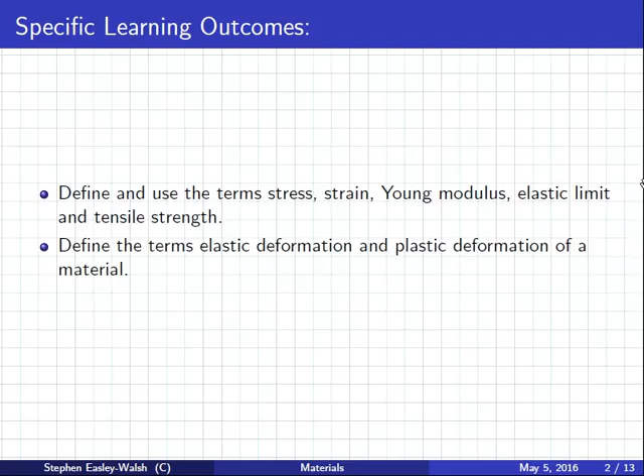Do you know this word, guys? Your English is quite good, so you might know it - deformation of a material. Form it more again, like deform. Yeah, but try to explain deformation without using the word deform. Broken? Not necessarily broken, I know what you mean, but it's not necessarily broken. Like making something from something else, from a particular thing.

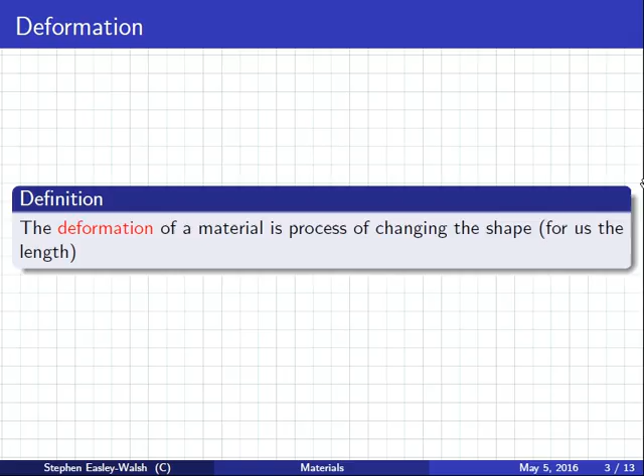For us, usually the length, by applying a force, a stressing force. So for example here, if I apply a force, look, and, well, I bent it without breaking it. If I change the shape of it by using a force, you can say that I'm deforming the material.

So deformation is changing the shape from a force. Got that? Yeah, okay, so that's deformation.

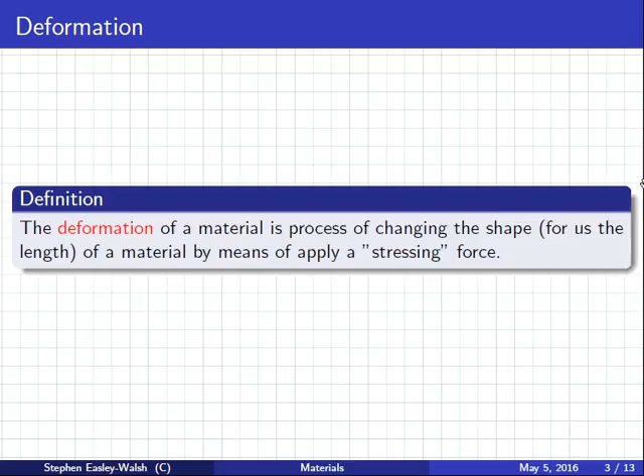Now, stress, I know you understand the word stress. You look at your physics teacher and you think, poor man, so much stress. But there's a physics definition of stress as well. I wonder if any of you know the physics definition of stress. Because, Mir, you said earlier stress over strain. Yeah, so do you remember what stress is?

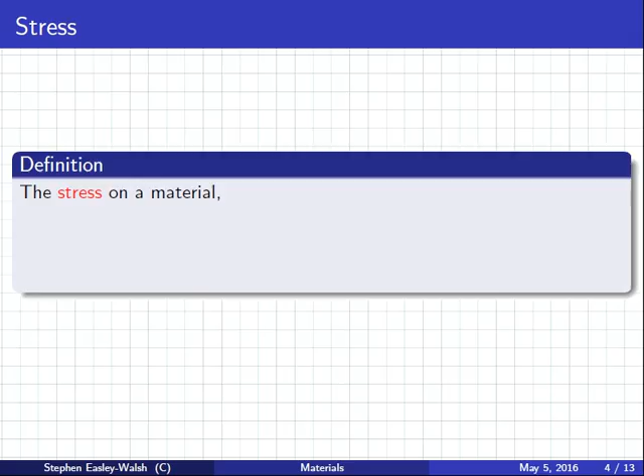I think one of them is like going in, and one of them is like... What's the formula for stress? Length over area - you're half right, one of those terms is wrong. So stress is the force acting on the material per cross-sectional area.

In other words, stress is force over area, which should remind you of something else that you... Pressure, yeah. So what's the unit for stress? Yeah, so clearly the unit is Pascal. So that's the definition of stress.

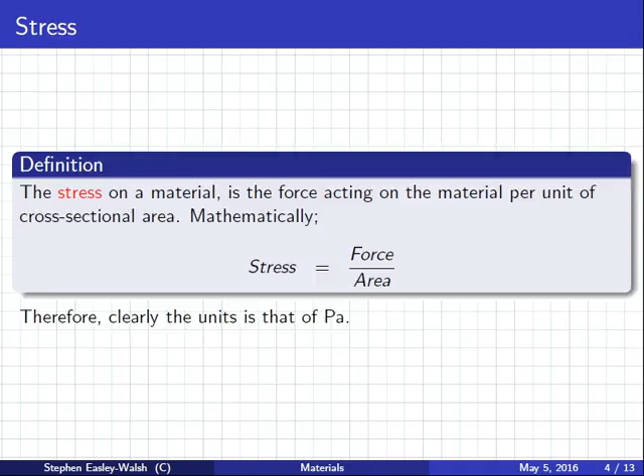Got that? Yeah, okay. Next - strain. Mir or Adnan? No.

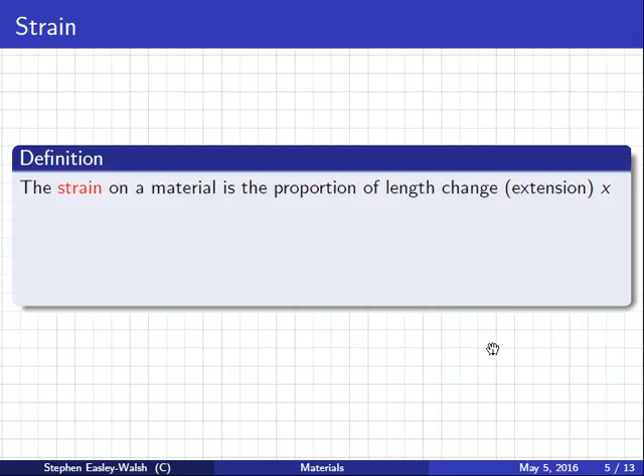Strain is defined as the change in the length, which I'll call x, that has taken place during a deformation. So basically, it's how much the length has changed compared to the original. So as a formula, strain is just the extension divided by the natural length.

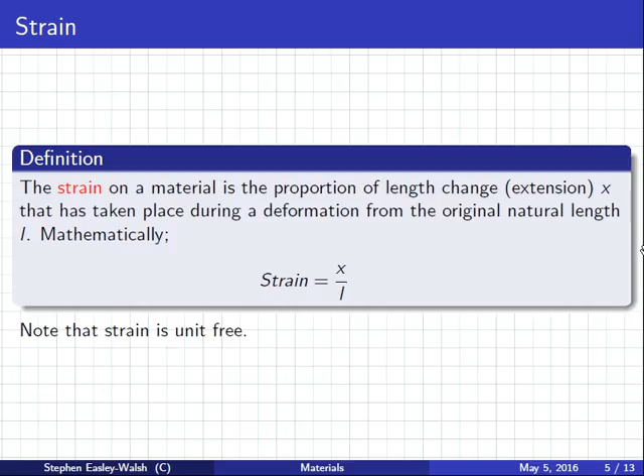And you know this one, Mir, Young's modulus. Now, just so you know, I use the letter Y, but I think a lot of books use the letter E - but I don't like that because that looks like energy, so I use the letter Y. Although in the exam they don't use any letter, they just write down Young's modulus, so it doesn't really matter too much. So Young's modulus is defined as the ratio stress to strain, that is, stress over strain.

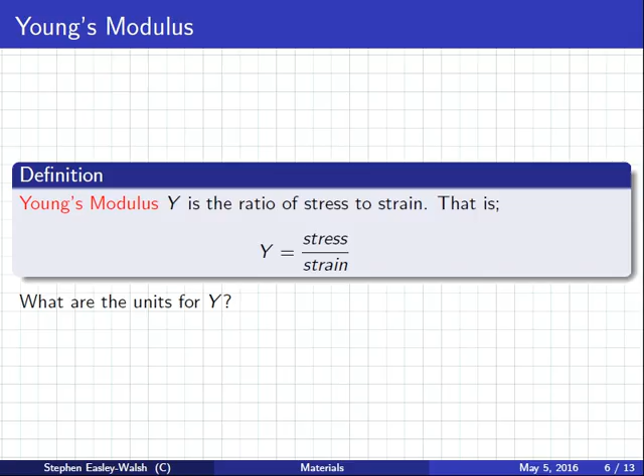What's the units for Young's modulus? Pascals. Okay.

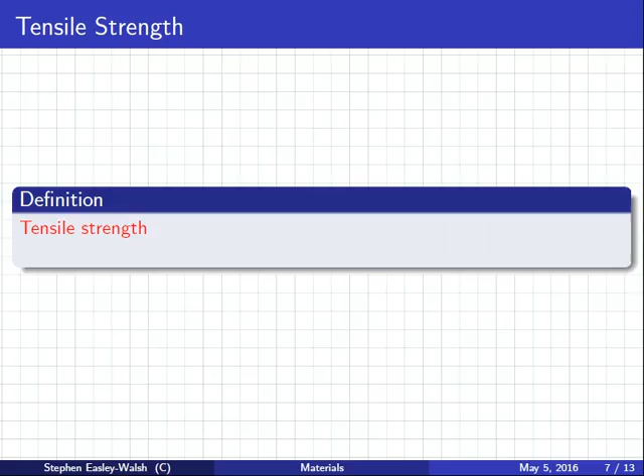Tensile strength, is this a word someone might know? No. Tensile strength is the force you need to basically break something - like a rope or a wire, it's the amount of force you would need to snap it. It's like the limit.

Tensile strength, of course, is measured in newtons - or is it actually newtons per square meter? I'm not sure actually, newtons I think. But all you need to know is the word, you don't actually need any formulas for it.

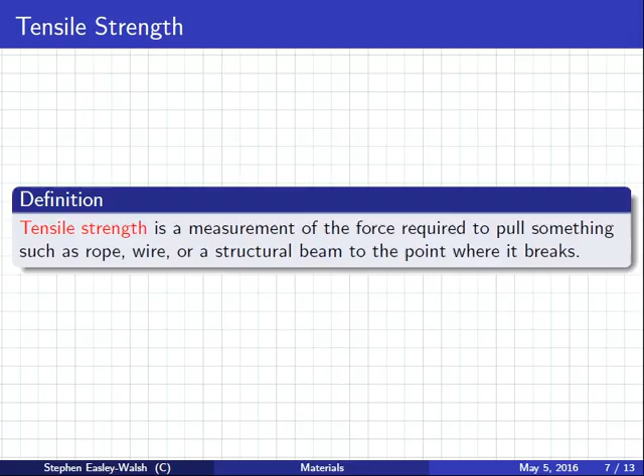Okay, let's look at a stress strain graph and compare it to an extension force graph. So... come on, it's frozen.

Stress strain, okay, so let's just look here. This one here is stress, and this one here is strain.

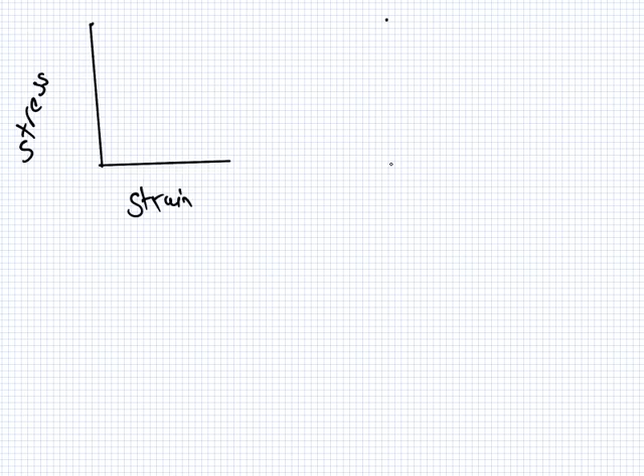How can we know that? Like, do we have to write something on the y-axis or the x-axis? Yeah, I wasn't clear with the way I wrote it. I should have written it like this: stress against strain, which is y against x always. It usually goes y-x.

So the next one then is extension force, for example here. Or did I put the graph the other way around last time? Did we do this graph last time, or am I thinking about the January students?

We did one graph, we said that it's important. What graph did I do last time? I don't remember.

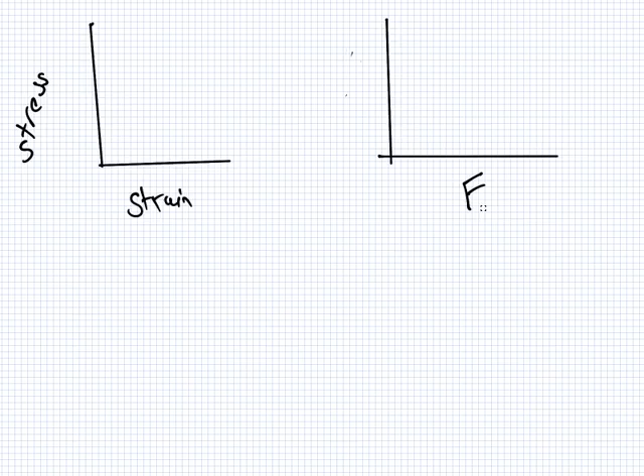Yeah, it was on the what? It was the other way around? Yeah, okay, and then I'll need to change that. It was like this, is it? Yeah, okay.

Do you remember what the slope of this graph was? K, it was K, wasn't it? Yeah. Now let's have a look at what we have here.

So the slope would equal - remember, it's stress over strain here. The formula for stress is F over A, and strain is extension over natural length.

Now you can change this into F. Let me think... A, 1 over A over 1 over L, times F over extension, like that. This can be cleaned up as L over A times F over extension.

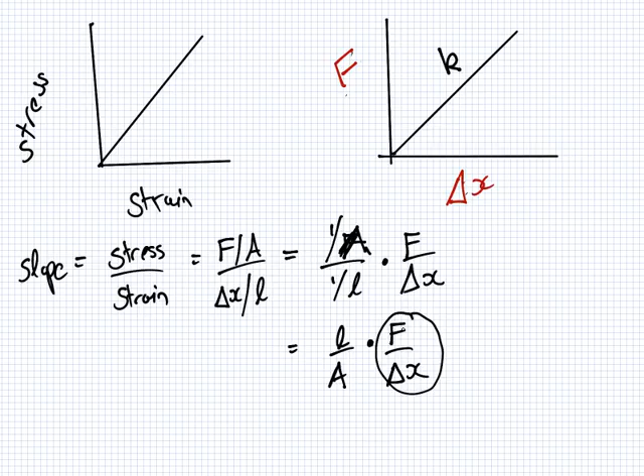Now, what is this though? If you look at this graph, what is this? Well, this is the K, isn't it? And what did we say the slope of this graph represents? What is stress over strain? Young's modulus.

So what I'm trying to get you to see here is that there is a strong similarity between Young's modulus and the spring constant, the stiffness constant. So if a material has a high value for K, then it also has a high value of Young's modulus, and vice versa. Remember we said if K is big, then it's not stretchy, it's kind of stiff. Likewise for Young's modulus - if it's big, we have the same feeling that it's a stiff material, not a very stretchy material.

So I suppose all I'm trying to get you to see here, if you want to write it down, is that Young's modulus has a similar interpretation to the stiffness constant. No, you don't have to write all this down, I'm just trying to get you to see the link. This isn't even a formula in the course - I just want you to see that Young's modulus is proportional to the stiffness constant.

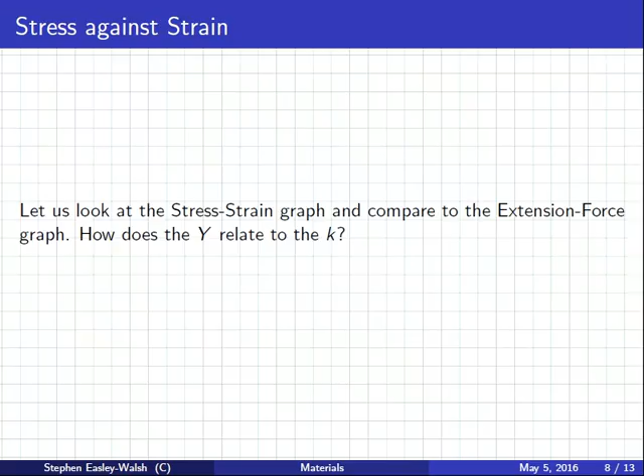Okay, so what we're going to do now is give you some values of Y for different materials. Come on, wakey.

I had extension on the x-axis, so we usually write the y first. So I just need to swap them.

Okay, let's have a look at some values here. Something that's really, really stretchy, like rubber, the Young's modulus is 0.10 times 10 to the 9. Nylon is also... they all look kind of big. I guess what I'm trying to say is usually the numbers for Young's modulus are quite big, because remember we said if it's very stretchy it should be small, and if it's very stiff it should be big.

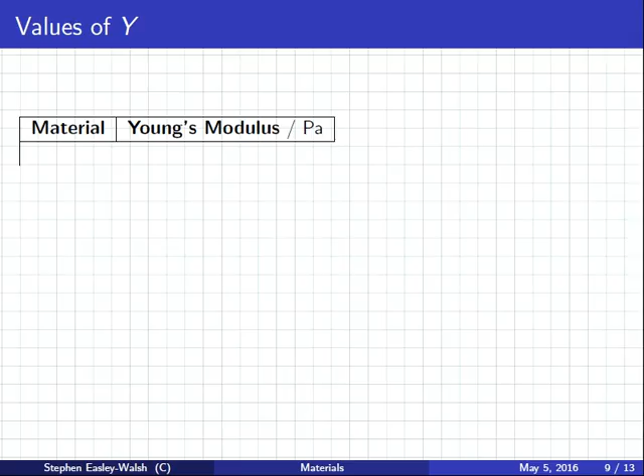So this is rubber. Is rubber stretchy or stiff? Stretchy. So this is small, although you can see how big it is, this is actually a small value for Young's modulus. So first one, rubber, 0.1 times 10 to the 9 pascals.

Okay, so let's move up. Do you know nylon? Yes. So that's also stretchy, 2 times 10 to the 9.

Now we're starting to get to material which is less stretchy. Wood is a little stretchy because you can kind of bend it, so that's 10 times 10 to the 9.

Glass, now we're getting into materials which are not stretchy, although glass is a little stretchy because you can kind of squish it a little bit. It's 70 times 10 to the 9.

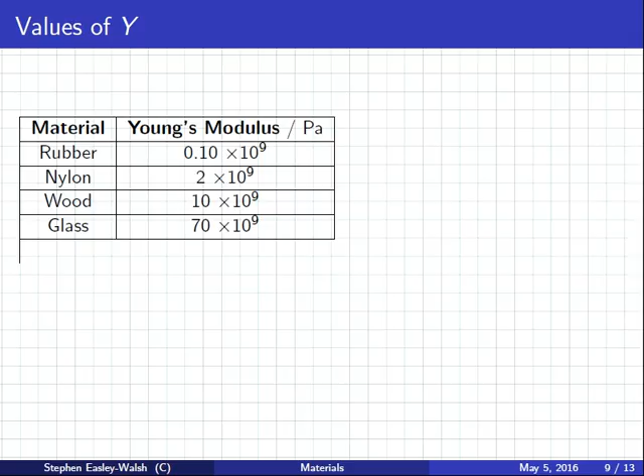Next, brass. What is it? It's bronze. No, what's brass? I can't remember what's next up. It's an alloy, copper and... aluminium? I don't think so. Iron? No. Do you do alloys in chemistry? Metal alloys? I think we did metals. Yeah, did you do brass? Yeah, it's copper and zinc.

Copper and zinc, okay, 100 times 10 to the 9. Copper, 117 times 10 to the 9. Steel, 200 times 10 to the 9.

Graphene, 1050 times 10 to the 9. And graphene is the material in your pencil. And that's it.

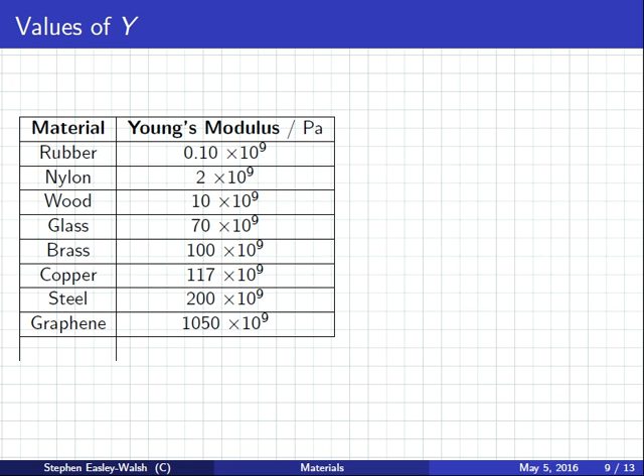Okay, you got those? I have too much. There, okay.

Right, so here's our first example here. You don't have to write it down, you can just draw it. A boy hangs a 100-gram mass at the end of a 1.5 meter copper wire, which is attached to the ceiling. The wire is 2 millimeters thick. So you can write or draw it, but we'll do the question together.

I might have one you can borrow.

Okay, did you write this down, Mir? Adnan? Yes. Continue? Yeah, okay, so let's have a look at it now.

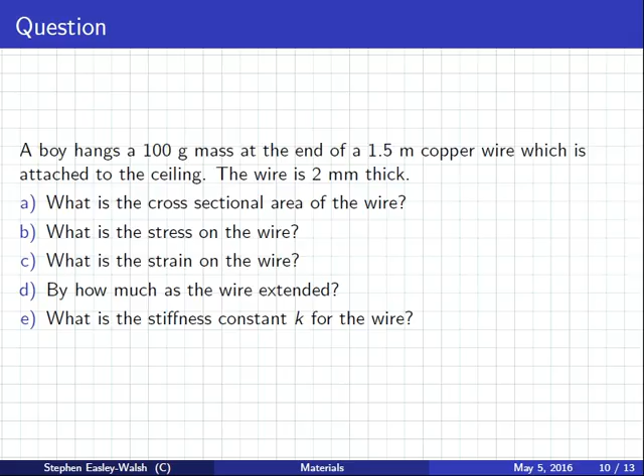Let's see, it's 100 grams, it's copper, it's 1.5 meters long. So, sorry, what did I say? 100 grams, so 0.1 kilograms, and the length from here to here is 1.5 meters, and the thickness 2 millimeters.

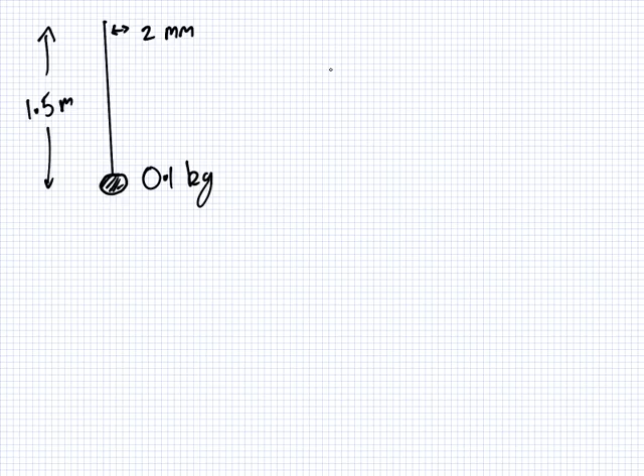And what was my first question? It was cross-sectional area. Okay, so you said the formula earlier, Adnan. What is it for the area of it? Yeah, the area is pi r squared. And what's the r here?

0.002. Gotcha, it's half of this, because that's the thickness. The radius is half of this number. So it's 1 millimeter is the radius, which is 1 times 10 to the minus 3 squared, which is pi times 10 to the minus 6, which is 3.1415 times 10 to the minus 6 meters squared. So that's part A.

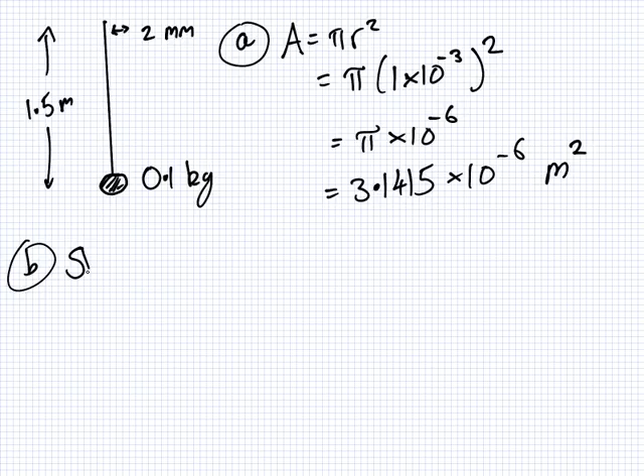Part B is stress, is it? Yes, stress is F over A. Now, what is the F here? What's causing the stress on the wire? Yeah, it's the weight. So that's mg over A.

Well, we were getting worried, we thought we'd have to send people to search for you. We were thinking maybe you fell down a hole. No, what happened to you? I missed the bus. Really? That's so unlike you. Why'd you miss the bus? Actually, I didn't miss the bus, I think the bus didn't come. Oh, you're changing your story. No, you should always stick to one story with your teacher. The bus didn't come? Yes, I went to the bus station and he didn't come, and then I went to another. That's okay.

We are doing physics, as you can see, because I was going to do maths, but these two people weren't in the last class, but they were in the last class for physics, so that's why I did physics instead. Wow, well not wow, do you have your physics stuff with you? Do we have physics today? No. I don't know, you'll have to write in your maths book and copy it later then.

Okay, what were you saying the force was, Adnan? The mg. So that's 0.1 times 9.81 over 3.1415 times 10 to the minus 6.

Okay, got that? Part C, strain. Now we have this formula for strain: extension over natural length. The problem is we only know one thing in this formula - the natural length. Do we know the extension?

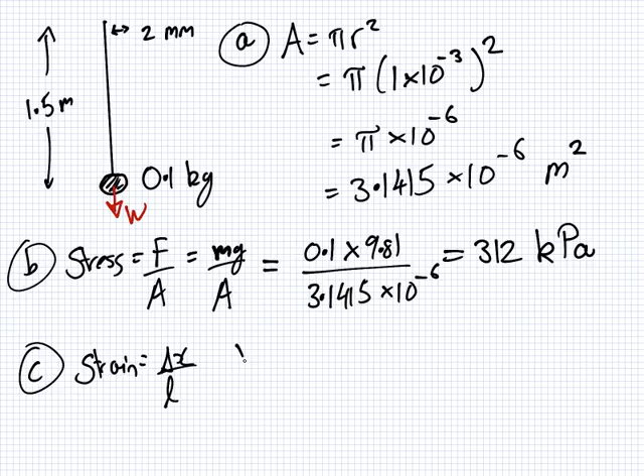We don't have to, we can use a different law. We can use the formula that Young's modulus is stress over strain, because we know Young's modulus for copper - I gave it to you. We've just worked out the stress, so the strain is the stress over Young's modulus. What is it for copper? 117 times 10 to the power 9.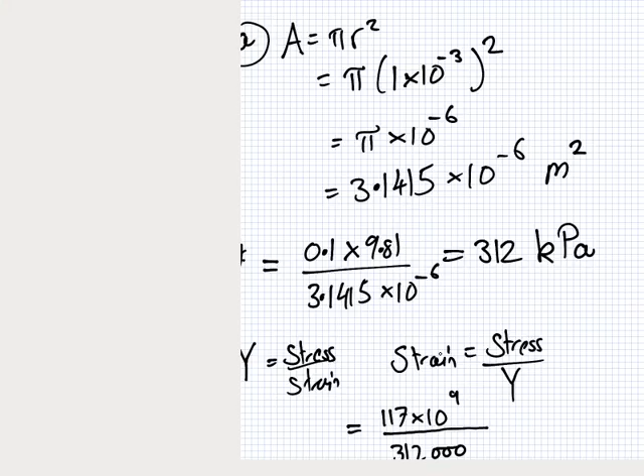.375 times 10 to the 3. That's the strain here. Have you studied this before?

So this is all confusing. Great. Okay, well, you're writing everything down? Okay, continue.

Now what is the extension? So I can use this formula now because I know the strain is 375 times 10 to the 3. The extension is what we want, and the natural length is 1.5. Wait a second, something went wrong here - my strain is too big.

Oh, it's over - I have this upside down. 312,000 over, what was the 117 times 10 to the 9? No, I'll just flip it around here. 2.67 times 10 to the minus 6.

Okay, strain equals extension over length, so that means extension is strain multiplied by length, which would be 2.67 times 10 to the minus 6 multiplied by 1.5, which is 4 times 10 to the minus 6 meters.

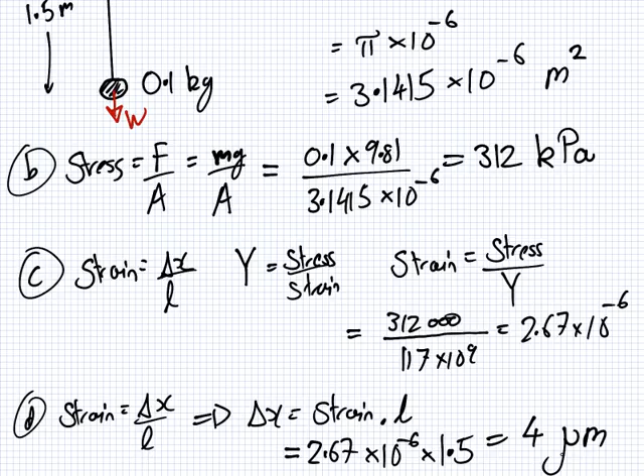And lastly, the K. So you have F equals K delta X, or Kx, whatever letter you want to use. So K is F over delta X, which is mg over delta X, which is 0.1 times 9.81 over 4 times 10 to the minus 6, which equals...

245 kilonewtons per meter.

This is a typical exam question, which I actually think is quite good in the exam. It's not that bad - you're just really using a couple of formulas, which are quite simple really, because they're all just fractions.

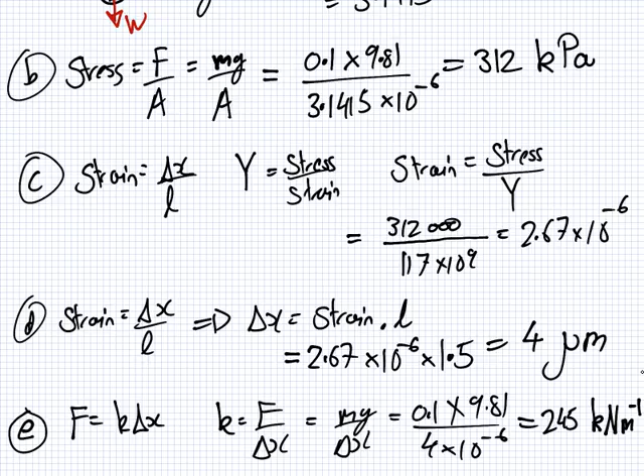Continue. Are you doing the tutorial now? I think we'll do the tutorial today as well. I think so, because yeah, we will. Okay.

Next question. Just one more: 4 metal beams, 2 centimeters by 2 centimeters by 2 meters, are used to support a platform. The platform of mass 3000 is suspended from the beams. 1000 kilograms is placed on the platform. The beams extend a total of 2 millimeters.

So let's do this one together. I'll try and draw it. You have 4 beams - yeah, you know what I'm drawing - and they're all attached to a platform, and this hangs from the ceiling.

And this platform, I said, is 3000 kilograms, and then somebody puts a mass on it of 1000 kilograms. When you place the 1000 on it, it extends, it gets basically 2 millimeters longer when you put the 1000 on it. What's the strain? What's the stress? What's the Young's modulus?

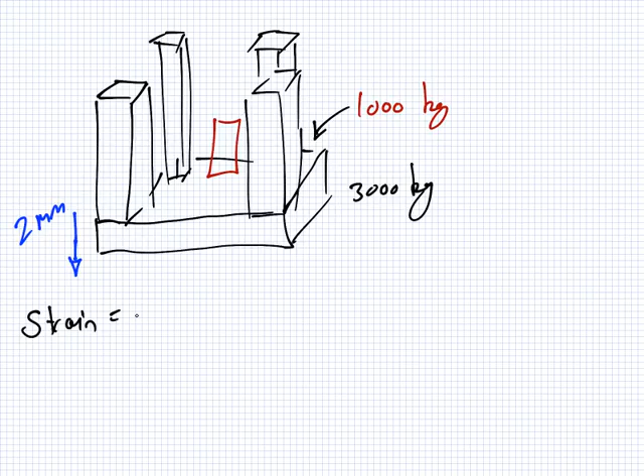So we'll start off with the strain. What's the formula for strain? Yeah, delta X over L. So that's 2 times 10 to the minus 3, and what did I say the original length was? I think it was 2 meters - originally it's 2 meters long. So that's over 2, which is just 10 to the minus 3.

So that's okay, yeah? Right, what do I want next? The stress. What's the stress here? Yeah, force over area. Now the force is what? The weight, 1000 G. Yeah, why not 3000 though?

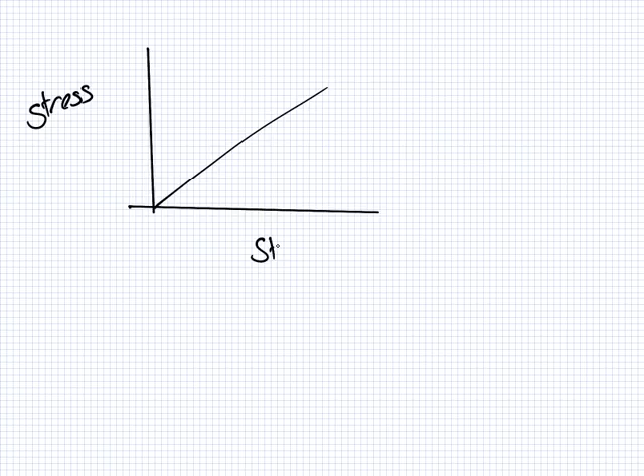Red herring, yeah. It's a bit like - if you were to look, I can't remember if we talked about this - but anyway, if I go back to the graph here, this is stress, this is strain. Isn't this what we drew earlier? Yeah. So Young's modulus is stress over strain.

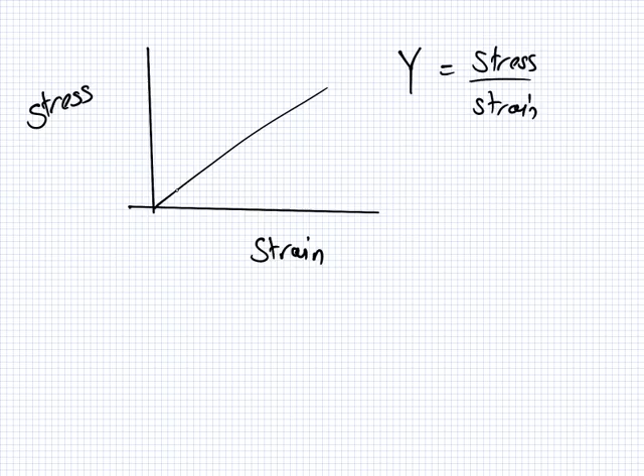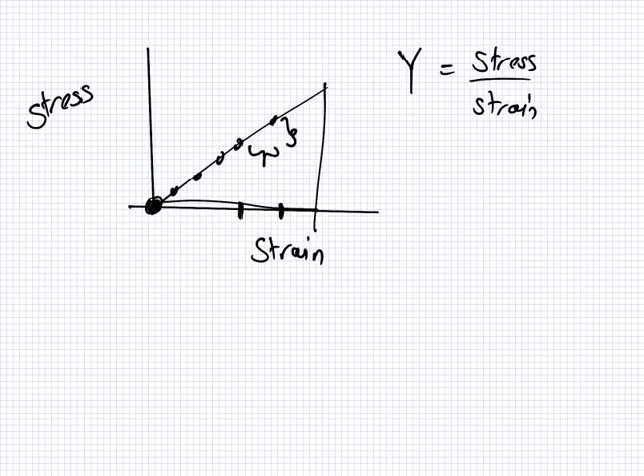So if there's already 3000 on it, or 2000 or whatever, and then you add more force, like 1000, the Young's modulus is just the difference in the stress divided by the difference in the strain. It's like the extra stress divided by the extra strain. Usually we start at 0, so it's the total stress divided by the total strain. But in this case we're not starting at 0, that's okay. We only care about the difference, so this 3000 is a red herring.

So if I go back here, it's 1000 G over, and what's the area? 0.02 times 0.02 times 4... or sorry, it's the other way, not 4 there. 1000 G divided by 4. Why do you think I'm doing that? There's 4 beams, so this is the force on each one individually. So what we're doing is we're just looking at one of them, so I'll divide this by 4.

And it's 2 centimeters. So why did you ignore that 2 by 2 meters? It's 2 centimeters by 2 centimeters by 2 meters. Yeah, this is just the area though. No, you don't care about the length, it's the area.

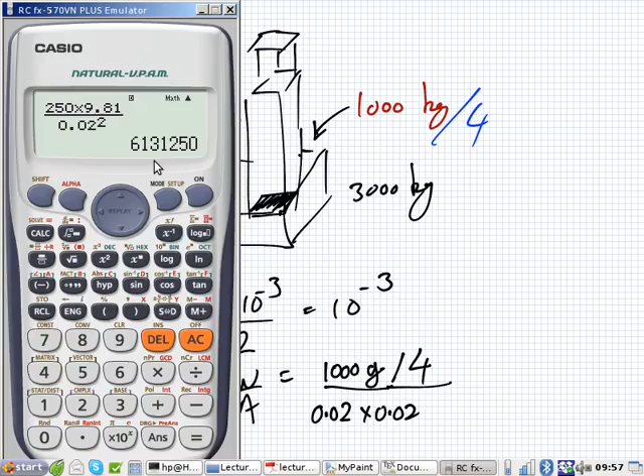So that would be 250 times... one, two, three... 6.13 mega. What is the stress on each beam? Each beam has this much stress.

What is Young's modulus? Yep. What's 10 to the 9? Giga. 6.13 gigapascals.

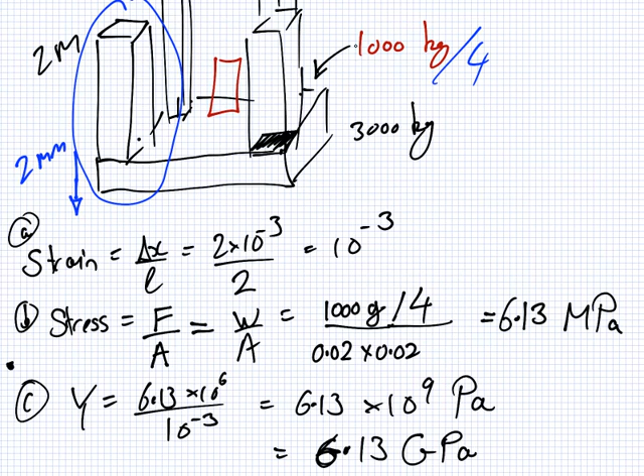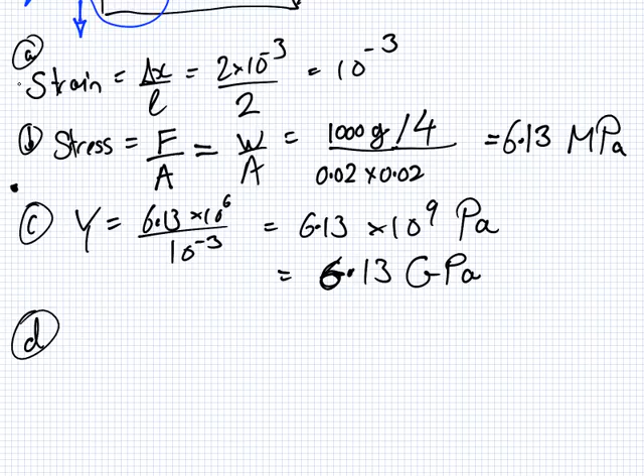Got that? Okay, and finally, how much more will the beam extend if there's another 1000 placed on it? So basically now you have 2000 on it. What's the extension? Okay, so we could use... I think we could go with Young's modulus is stress over strain, because we know what Young's modulus is now, which is a constant. Stress is force over area, and we know the force and we know the area. And strain is delta x, which is what we want, over the original length.

That would be, if I rearrange that, Young's modulus times delta x over L equals F over A. So that means delta x would be LF over YA. That's 2 times 2000 G over 4, because we're looking at one beam, over 6.13 times 10 to the 9 times 0.02 squared. Is it 12 or 10 to the 12? It's giga, a giga is 10 to the 9. Yes, yeah, it is.

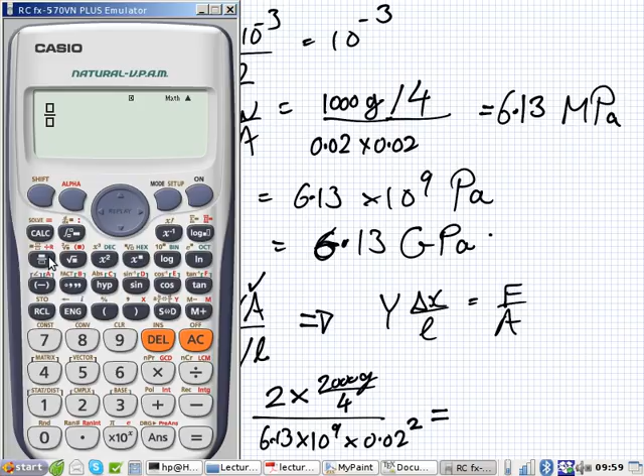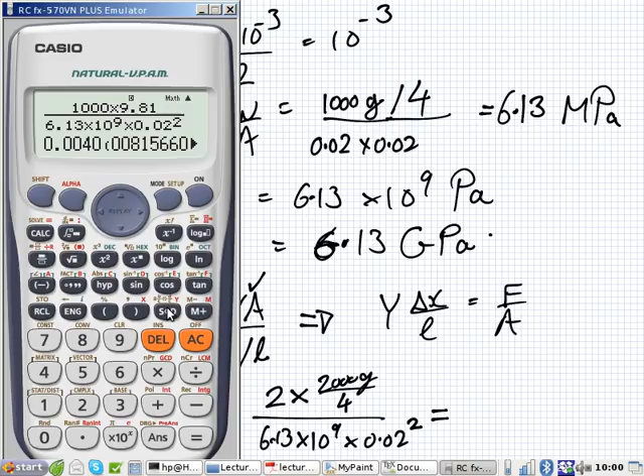Yes. Two, yeah. 4 millimeters? Yeah, 4 millimeters.

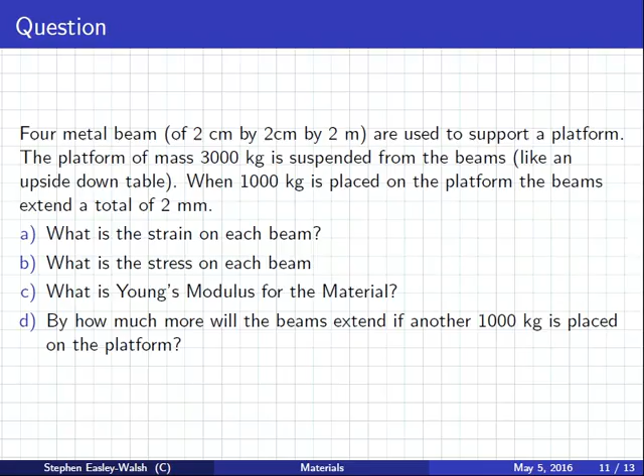Now, I was being a bit sneaky here in this question. I said, how much more will the beams extend if another 1000 is placed on it? So this here is the extension for 2000. But I didn't want that. I wanted the extra extension after you put on another 1000. It's only 2 millimeters. So, huh? 2 millimeters? Say again, so it's only 2 millimeters?

Oh, you're halving it. Yeah, it could be, but we have to work out what the extension is when it's 1000. It's done the same way, except what number do I change here? 1000, this is 1000 instead of 2000. So this is when you have a force of 2000, and if you had a force of 1000 kilograms weight on it, then what would it be? It'd be 2 millimeters, so yeah, you're right, Adnan. It would just be the extension, which is extra, is just 2 millimeters. So what happens is, first it extends by 2, and then when you put another 1000 on it, it extends by another 2 millimeters. So the answer is 2 millimeters.